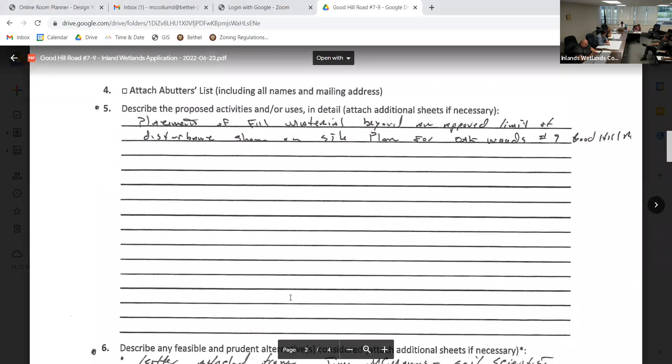If I can read, shown on site plan for Oak Woods, 9 Good Hill Road: the feasible and prudent alternatives considered. There is a letter attached from Jim McManus, a soil scientist, which as of this afternoon we just got. Very good, I have 4 copies. Okay, and then see attached.

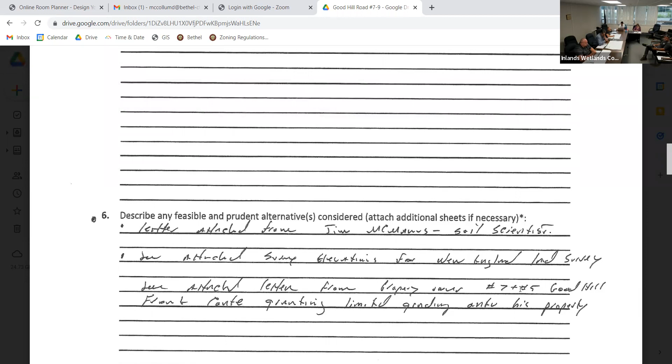Something elevations from our New England Land Surveying, which I'm assuming is the survey before you. Correct. See attached letter from property owner at 7 and 9 Good Hill Road, Frank Conti, granting limited grading onto his property. There's the signatures, and then there's the letter received from Frank Conti, essentially indicating activity having taken place on his property, which seems to be indicated by that line that goes to the north of the property line there.

No, where are you trying to point there, Kevin? This one. That's correct. Yeah, it's the dash line. I'm gonna point it out on the Zoom screen for you guys.

The context for this from a wetlands perspective is this was subject to a previous Inland Wetlands Commission approval for regulated activities, which included the buildings you see on that survey, the parking lot, the driveway used to service the property at 9 Good Hill Road, and the associated grading and other improvements. I can pull up the previous approved site plans for context as a comparison for what was approved before, so you guys can get an idea of the specific area we're looking at.

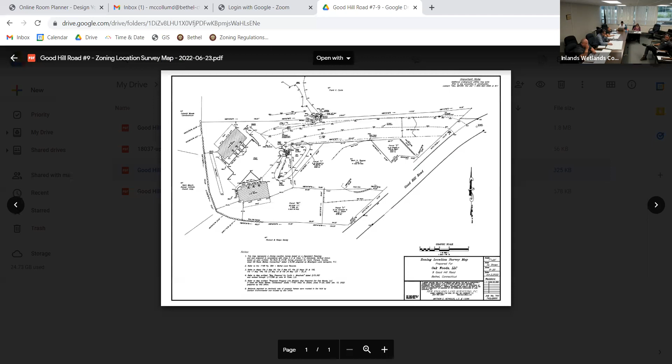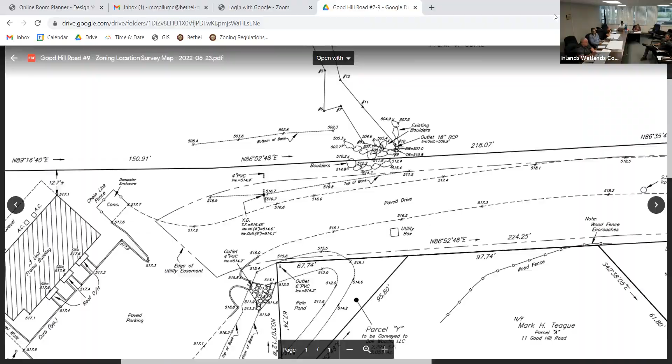Let me just pull up the survey here real quick so that everybody can understand what we're talking about. This notation here that says bottom of bank, this area my cursor is currently encircling, is part of what you're going to be looking at tonight for the application materials. And like I said, you're going to be comparing it to the site plan. Let me pull it up here on my screen.

And that was from, correct. Okay.

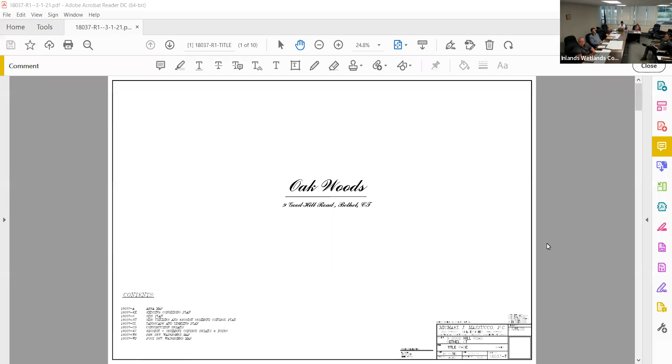I wonder if he knows he's on mute. Nico, do you know you're on mute? Okay, you can hear us. He's joined twice, I'm not sure. You can do that, I don't know if you're trying two different locations. Yeah, hi everybody, sorry, there you go. No worries, you hear me? Yes we can, thanks Nico. Your audio is messed up, so be careful. Excuse me.

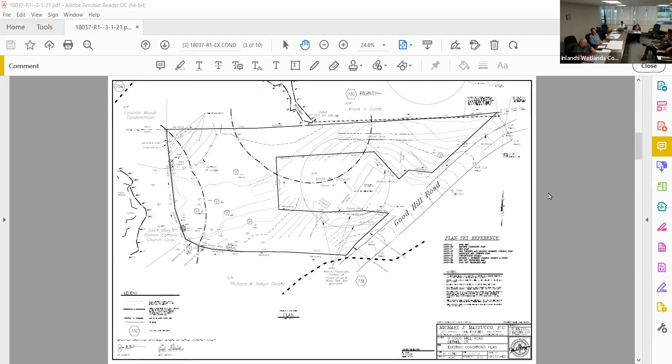Okay, so what you have up on the screen was one of the sheets from the approved site plans. The majority of what this site plan entails isn't party to what you guys are going to be looking at. In other words, the parking area, the buildings, the grading around the buildings where my cursor is going, that's not what is pertinent for this modification tonight.

What you guys are going to be focusing on is the area surrounded by my cursor here. What the approval was granted for was for grading to occur solely on 9 Good Hill Road. There is a clearing limit line, shown as the CLL, which is dashed, which was the approved limit of disturbance, showing it going in close proximity, but not encroaching past the property line for 9 and 7 Good Hill Road. There was grading that was...

The purpose of the grading there was so that the access driveway could be sloped down to meet the toe, or to match the existing grade with a toe slope there at that limit line, and then a retaining wall, which is where my cursor runs here on the screen. So that's what is being asked of you tonight, is to modify what was approved here on these plans to what is shown on that survey.

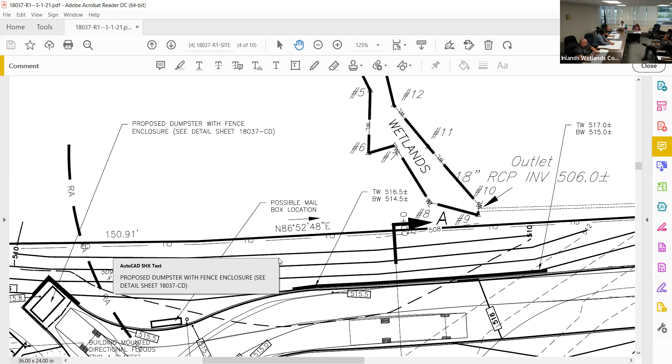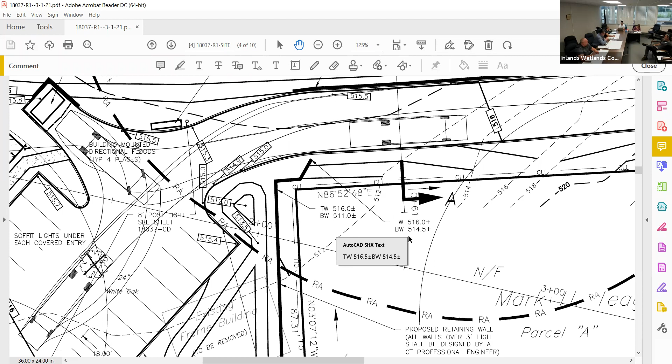What does conveyance mean? So the conveyances are - there's only one conveyance and one land swap. This has two conveyances. The conveyances are not germane to this modification. They're not part of what is being sought for tonight.

Okay, and can I ask about the rain garden looking different, shape-wise? The rain garden - the field modification for that, certainly if you guys want that to be included as part of what you guys review. The reason why that has been left out is because that regulated upland review area was already disturbed, and its alteration does not appear to have any direct or indirect impacts to any of the wetlands on the property. But I'll answer any of your questions afterwards. That's fine, I'll look up the definition.

Okay, so we're concerned with a retaining wall - the grading that has occurred is what is being sought for as a modification, and an alternative to that retaining wall being installed.

So just so I'm clear on process, we accept the application, then we'll listen to it and make a decision at the next meeting? Well, so it's apparent that there's a soils report from the wetland scientist that the applicant has in hand for you guys to receive tonight.

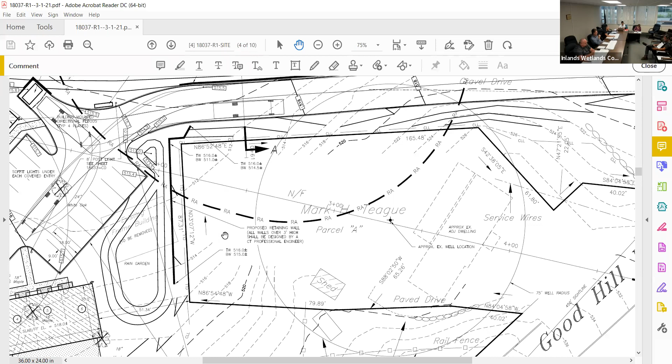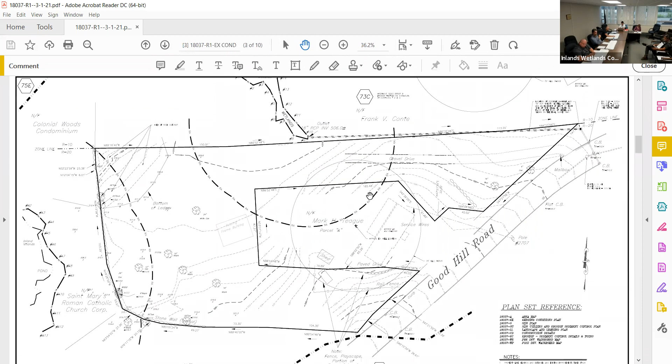Modified wetland application: an application must be submitted to the Bethel Inland Wetlands Commission requesting an ex post facto modification to their resolution of approval dated July 29, 2020, for the observed placement of fill materials beyond an approved limit of disturbance, as shown on the site plan set, Oakwoods, 9 Good Hill Road, Bethel, Connecticut, prepared by Michael Mazzucco, PE, dated April 5th, 2019, last revised April 12th, 2021. Please provide authorization from the abutting property owner of 5 Good Hill, Frank Conte, to submit this application for any and all encroachments onto the property as a result of the placement of fill materials.

So to start, I have a letter, and I'm going to give it to the chairman, that David put up there from Mr. Conti, which states he has absolutely no problem with the fill. Is this dated correctly? Just a copy for tonight, I have the original. Today's date is the 27th.

All right, so Mr. Conti, I can have it back for a second. I'm just going to read what Mr. Conti said: June 11th, 2022, to whom it may concern - I, Frank V. Conte, grant limited grading on the northern property line bordering property owned by Oakwoods LLC. Signed Frank Conte, 6/11. So he has absolutely no problem with the grading. We actually talked about it earlier in the process last fall.

Now, obviously, you guys have the map, you have a copy of it. You can see where we had New England Land Survey go back out there and survey the toe of the hill, where it meets the vegetated part of the property - basically the wood line, because it wasn't vegetated. We ended up regrading that slope so it went right to the edge of the vegetation. We're not covering any more vegetation, we just brought the slope down to a 2-to-1 slope. And then I had Jim McManus from New England...

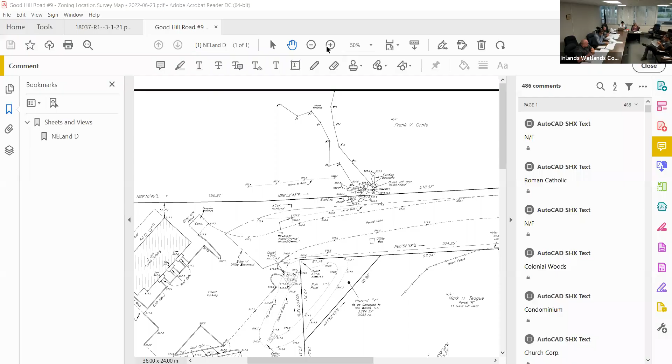So there was supposed to be a stone wall there. Yeah, well, we did a natural slope instead, we graded it. There was supposed to be a wall higher up on the driveway, which would give you the 2-to-1 slope drop. So I looked at the site plan in the field, and that would put a wall right on the edge. David, can you go back to the original site plan? Yes, I can. But right on the edge of the driveway, which to me would create...

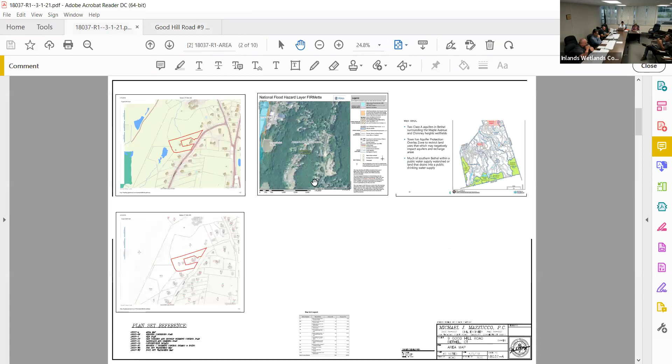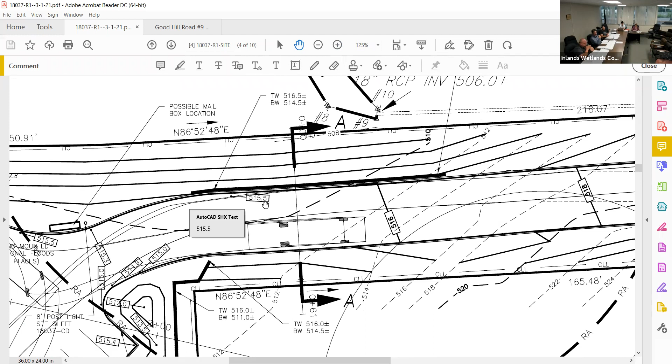While you're driving in, correctly following the dark line, is that your original retaining wall, that heavy line? Proposed? Yeah, you see the heavy line right there. Got it. So this heavy line would have been the retaining wall, which is only a 2-foot retaining wall, 24 inches. From here, here's the RCP pipe, up here to over here, we're somewhere right about here.

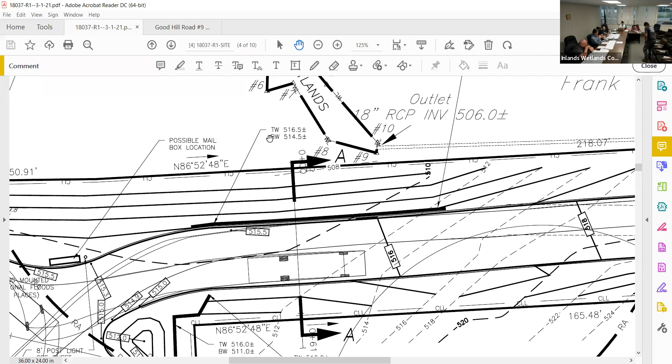Okay, and then it comes around and it does not go into the wetlands. It just encroaches closer to it, but does not, as Mr. McManus says, does not impede it, will not impede it in the future. Did the soil scientists look at it? No.

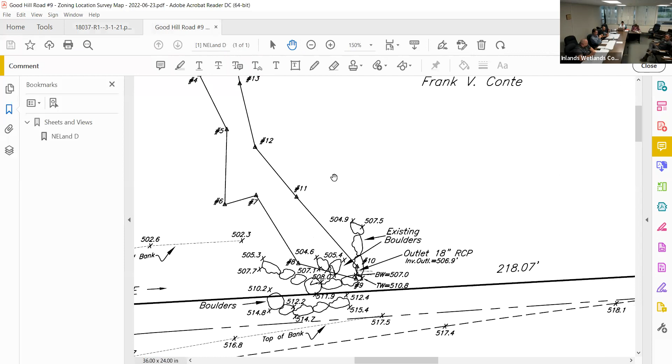I mean, the direct implication is just water volume. There's no more water going there. We're not putting water in, we're not taking water away. The only part of this application is that we're 6 to 8 feet closer to the wetland, in the upland review area. Not the wetlands, we're not in the wetlands, we're not 8 feet in the wetlands, we're in the upland review area, that's it. I'm just asking, do we need our soil scientist to look at it? That's at your discretion.

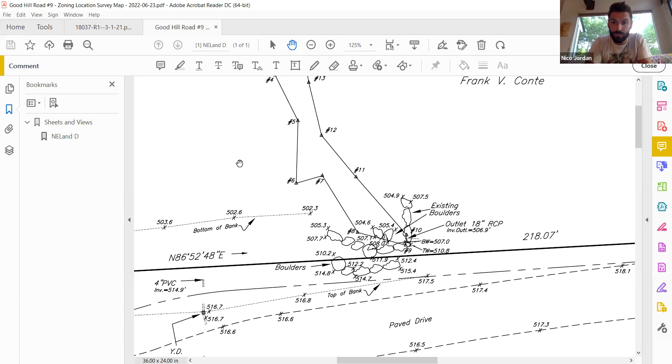The only problem I have with it is the work's been done before a permit was brought forth. We didn't even know that, I didn't know this until David said this might be an issue.

I have no problem looking at it and making a decision, but why don't we just have one of our soil scientists look at it, get his stamp, and ask for approval? I'm not even gonna go there because I don't think we had that.

That's not what was agreed upon. That's why we're here. I'm looking at it no matter the reason why. Normal process for us is to accept, and I've tried to approve same day and not been allowed to, so my thought is...

Get the information tonight. I don't see this being a long drawn out thing. Have our soil scientist take a look at it. I'm not a soil scientist, but I'm not expecting a red flag. Then we'll make a decision next meeting.

The soil scientist you guys have worked with in the past from the Northwest Conservation District, her name is Cynthia Rabinowitz. Are you requesting her to do a third-party review of the activities that have taken place? Yeah, it seems reasonable.

I don't feel that it's an on-site type thing. I'm not an engineer, that's why I'd like them to look at it, that's all. It's not gonna hold anything up.

I agree, I like Cynthia Rabinowitz, I think she does a wonderful job. But I would also ask that if they're gonna go out there and look at this, to report what kind of water is coming out of there from a town RCP pipe that was put in there, that shouldn't have been put in.

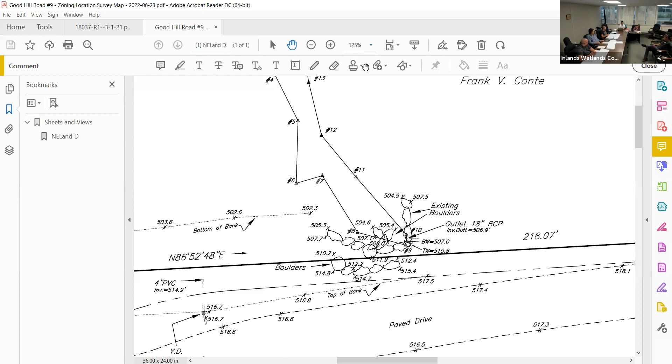No concerns, we're good. So do we want her to conduct an on-site investigation, or do we want her to just refer to the documentation that's been given? If she's comfortable from what's in front of us, that's all. If she's comfortable with the documentation, it's fine by me, the wetlands soil scientist, but if she feels concerned, get it taken care of.

Okay, that's fine. I'm a taxpayer too. I don't want to spend any more money than needed. Again, there's no reason to make it longer. I just got my taxes. Yeah, won't go there.

Okay, so when would you guys like to have her findings brought to you by? Well, I would like to get this... October? No, I'm kidding, next meeting. Sorry, I had to say that. You can do it so, next October, as far as I'm concerned. By that time, I'm done.

I'm moving forward, so your next meeting as per your schedule that you made at the end of last year is July 25th. Yeah, that'd be nice. Yeah, she could have it. I'm okay with that.

I don't know if it's possible to have it a week before or a couple days before. Sure, just prior to the meeting, so that way we can review and approve. Give us a chance to look it over. I don't see a major thing. I don't think it's a long read either. I think it'll be a pretty quick turnover.

So would a week's time to have you read it be enough, or would you want it sooner? I mean, unless there's something explosive in there that we're not predicting, which I doubt. The only thing I would say is if there's something that surprises us, to give Mr. Draper's team time to address it, but I don't foresee that happening.

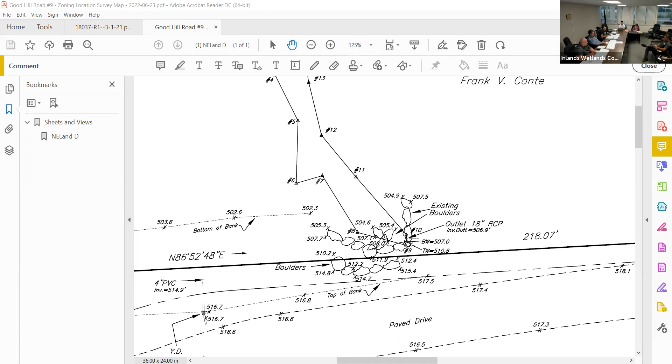Let's reach out to cyberspace. Nico, Pat, Sal, do you guys have any questions? Hey, that's all right, thanks. I do not, as long as you guys covered everything that was in the documents. I saw that DeMayo called out a bunch of changes and stuff. Did you guys already go over that?

Right, so there are engineering items, some of which are germane to what is part of the regrading, some of which are not. We can go through that more in detail if you want.

Once Mr. Draper's engineer, Mike Mazzucco, satisfies or addresses all of the comments that James has. Which he has already. I have the letter and I can read it if you want.

I'll just go with what's germane to any kind of wetlands type thing, or rain garden or something, because Lawrence, give me the copy of it. What is the date on that? June 23rd. We have a copy of it, we can make you a copy of this whole thing. This was from David McCollum to James DeMeo.

I'm just gonna read it real quick, just germane to wetlands. As you know, I was present at the site visit, conducted on 6/9/2022. The following comments were discussed with the property owner and their engineer, Mike Mazzucco. Additional documentation needs to be submitted.

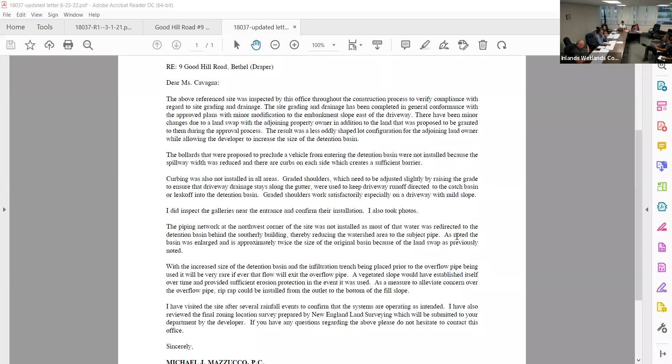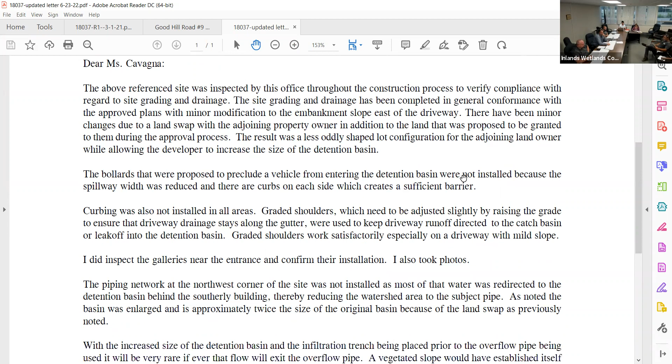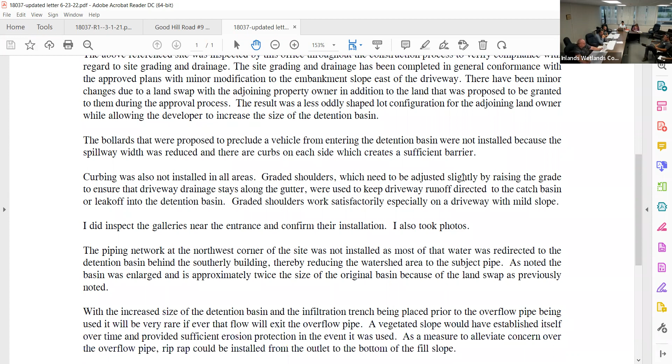There have been minor changes due to a land swap, which Pat asked about, and I can go on about it, with the adjoining property owner, in addition to the land that was proposed to be granted to them during the approval process. The result was a less oddly shaped lot configuration for the adjoining landowner, while allowing the developer to increase the size of the detention basin.

The bollards that were proposed to preclude a vehicle from entering the detention basin were not installed because the spillway width was reduced, and there are curbs on each side which create a sufficient barrier. Curbing was also not installed in all areas. Graded shoulders, which need to be adjusted slightly by raising the grade to ensure driveway drainage stays along the gutter, were used to keep driveway runoff directed to the catch basin or leak off into the detention basin. Graded shoulders work satisfactorily, especially on a driveway with a mild slope.

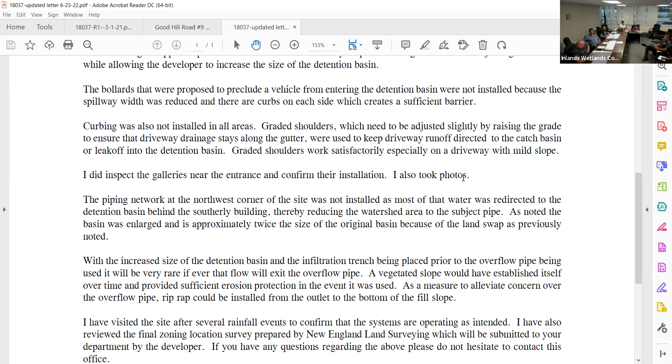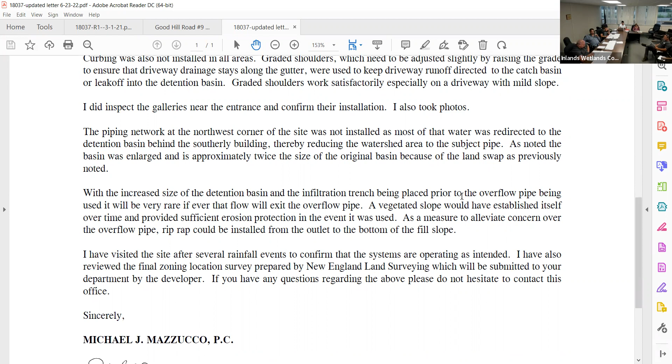I did inspect the galleries near the entrance and confirmed their installations. I also took photos. The piping network at the northwest corner of the site was not installed, as most of the water was redirected to the detention basin behind the southerly building, thereby reducing the watershed area to the subject pipe. As noted, the basin was enlarged and is approximately twice the size.

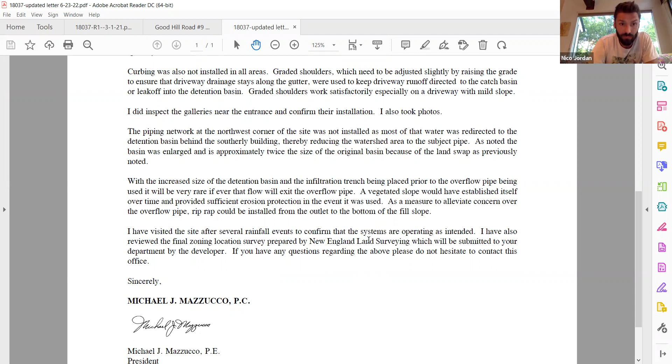This is the rain garden. It's approximately twice the size of the original basin because of the land swap as previously noted. With the increased size of the detention basin and the infiltration trench being placed prior to the overflow pipe being used, it will be very rare, if ever, that flow will exit the overflow pipe. A vegetated slope would have established itself over time, which is seeded and hayed right now, and would provide sufficient erosion protection in the event it was used.

As a measure to alleviate concern over the overflow pipe, riprap could be installed from the outlet to the bottom of the fill slope. I have visited the site after several rainfall events to confirm the systems are operating as intended. I have also reviewed the final zoning location survey prepared by New England Land Surveying, which will be submitted to your department by the developer, which it has. If you have any questions, please do not hesitate to contact this office.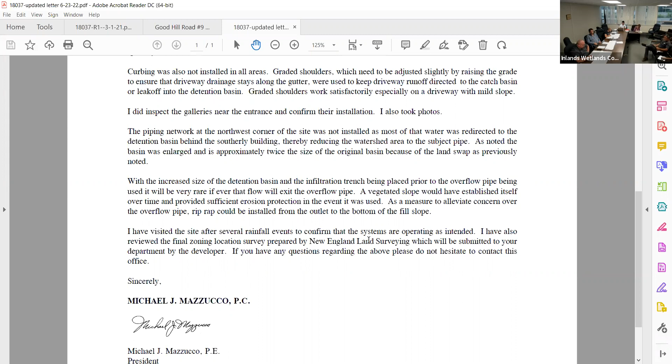So what I would say is you should consider receiving a letter from our Public Works engineer, James DeMeo, to confirm that everything in that letter sufficiently addresses his concerns. James should be giving it to David, if he hasn't already. I talked to James on Friday myself, and he was just waiting for Mike to change two things, then it should be an automatic process. So once I get that letter from James, if he hasn't already started working on it, you guys will have that ready for your July 25th meeting.

Can I just ask one thing and make sure I'm allowed to? Pictures of the slope that we're talking about, isn't that from a what month? These are just vegetated. Oh yeah, because I'm gonna see if a storm comes through. I expected, I had a little bit of grass on there, everything looked beautiful, but just in case I want to make sure there's no issue. Well, the driveway, everything is pitched.

David, can you bring up the site plan? You can tell that from here, just from this photo you can see the pitch of the driveway going down. I just want to make sure we have a heavy storm and we don't have that erosion. What if we have a heavy storm while the seed is progressing and it just washes away to begin with?

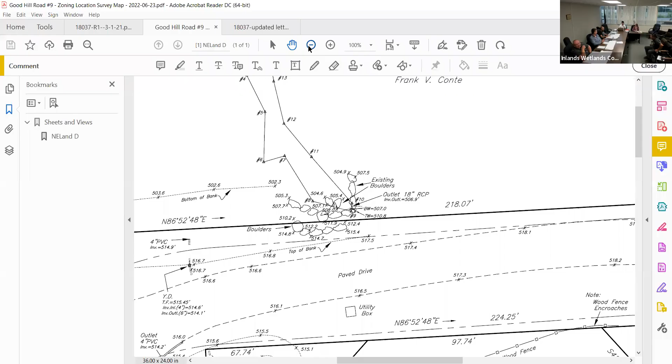I had that happen to my house in Torrington. We just requested to fix it. Yeah, just blow it up please. I totally understand. Shrink it down, I said it backwards, just so it shows the whole site.

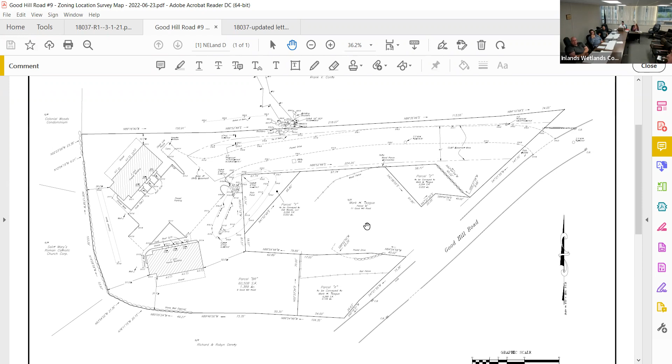So this area right here was the property of 9 Good Hill Road. I conveyed this to Mark Teague, not in exchange for anything. This was part of the planning and zoning approval, not that I asked for it, this was a request. I gave it to Teague. It wasn't planning and zoning making me give it to Teague, I just want that crystal clear. So I'm doing this because a lot of his stuff is on here: his fence, his driveway, his play set, his shed. I also paid for this wooden fence along the top of this hill right behind his house because his yard goes out and then it drops down. All back in here is sumac trees, and it's very steep. And that's my property, but it's level. So what we did, and there's a stone wall here, was cut all his grass, his house.

Matter of fact, this fence encroaches on my property, just so you know. Okay, and I don't have a problem with that.

He was cutting all the way down to here. Mark's house is right here, 20 foot off of this line on an angle, and it came across like this. So to make it more equitable, we're not taking his yard, because I don't want it. I said, Mark, he was doing nothing down here because this all slopes down to a flat area. I said, Mark, do you want to do an equal land swap with this piece of property?

And I'll take it down here, that way I can enlarge the stormwater rain garden, detention, whatever you want to call it, so it looks nicer. And he was like, absolutely, because now I have a yard. So it was mutual, and he's happy with it. As a matter of fact, that answers your question.

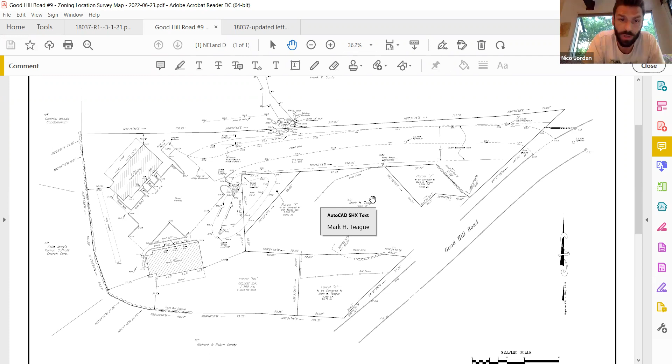So the rain garden is probably twice the size of what it was. We're capturing even more water, and it's a vegetated state with something called salix, which again is a willow. I thought I might have had his in here. I just want to.

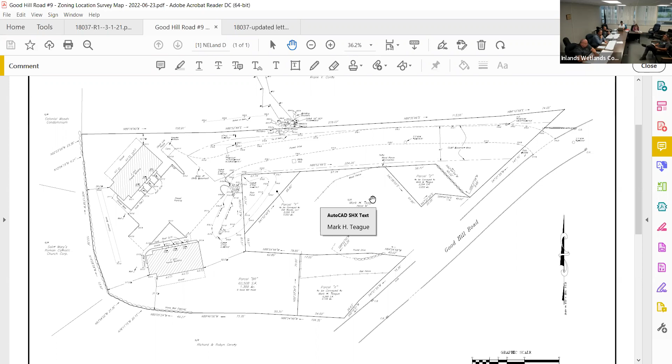And I sent this to David on June 10th. This was just after Mr. DeMeo, James and David and myself and Mike Mazzucco were out there, and it's addressed to whom it may concern. Unfortunately, Mr. Teague has a pretty tough mortgage company to deal with, trying to do the land swap, so it's taken time.

This is something that Mark Teague signed as well as I did, and this was just something so that we agreed on it. I just want to read this to you so you all understand what's going on and that I'm a good neighbor. Mr. Teague's mortgage complications for the land swap and conveying parcels is ongoing. See a letter from Morris Law Group, which I did send to David, concerning this ongoing matter, which will be addressed when his mortgage company issues the release, mutually agreed by both parties.

I just mentioned about the fence. I have no issues with the encroachment on it.

There was a question about spruce trees on the backside of the rain pond, but now the rain pond's bigger, it would be right into the hillside, didn't make any sense. So we put the trees on the other side. We didn't want spruce. And again, we agreed on it together. What kind of trees do you guys want, is what I said to him. The whole idea was that we put a lot more trees on this property so people wouldn't see this as much.

Frank Conte wanted some pine trees, he got pine trees. Mr. Mark Teague wanted flowering trees, he got flowering trees.

Bradford pears were placed instead of evergreens along the driveway for better screening, and I already wrote that, all mutually agreed to. There's actually 2 additional parking spaces on the property, which wasn't required. There's almost 50% more deciduous trees for screening that was shown on plan. And then the back part, it's actually changed because I did locate some pines.

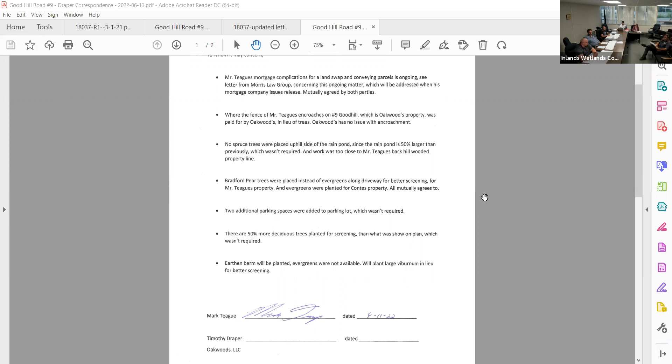The earthen berm will be planted. The earthen berm has been planted with evergreens, which was on there. It was white pines, I believe. And that's all set, so that's done, just so you know.

So if you remember, this was a wetlands thing, why those pines went in there. Because when the tree frogs and the amphibians and all those things want to do their thing in the springtime, they didn't like the light.

One other thing was brought up about the lights on the back of the buildings. It's actually a building code where they have to be on a building, that's what they are. That was the old plan, wasn't it? I don't remember, but it was brought up, and I'm just bringing it back up to you since it was brought up to me. That's for safety, it's a building code that has to have light on the back of a door, on an entry door. That makes sense, though. Oh, absolutely, that makes sense. Can't be argued.

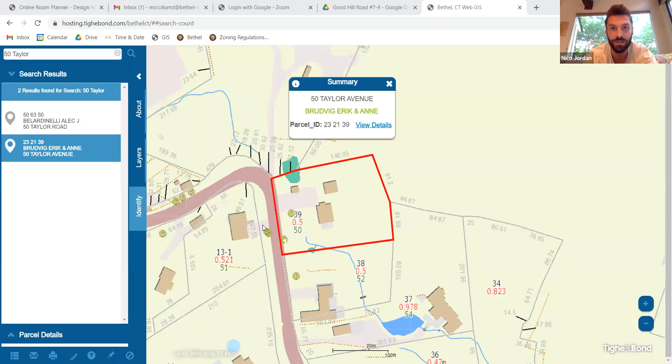How's Bethel, you guys? I'm up in Vermont right now. I was gonna say, you don't look like you're in Bethel there, Dave. We're in Vermont, I got my luau shower. I'm up in Stowe at the moment. I was in Hubbardton all last week. It's beautiful up there. I spent a lot of time in Hubbardton, in the West area. I go up there in the summer, I don't go in the winter. No way, I love snowboarding up there. Yeah dude, there's so many cool waterfalls and everything around here. It's really nice, it's been good. So I'll be back down tomorrow.

To get us back to reality, sounds like a blast Nico, but there is a planning and zoning - a zoning permit application that has been submitted to the land use department for 50 Taylor Avenue. It is the property whose bounds are highlighted in red on the screen. It is before staff for 2 additions to an existing single-family dwelling, whose structure is where my cursor is on the screen. I don't know if you guys can see that. Okay.

As part of the work to construct these 2 additions, part or the entirety of an existing septic system has to be replaced. As part of that, an existing pipe that carries water from a water course, which is this blue line here - the inlet for the pipe is here, and the outlet for the pipe is here. It goes into a wetlands area, and the water course here and the wetland system here were both flagged by a soil scientist. This section of pipe that connects the two has to be replaced.

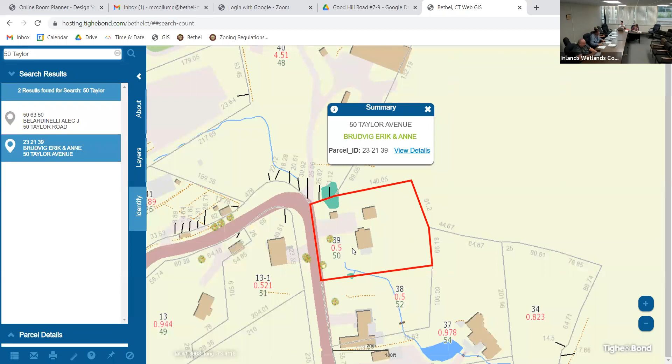I just want to make sure your guys is okay again, just because this is substantial for an agent approval application, and I just want to make sure I'm not going outside of my bounds as your agent to review. Not at all, Dave. You're good. Okay, that's all I've got.

Commission comments? Anyone have any? Craig? Kevin? I'm okay, I'm good. I have a question.

I heard, I don't know if it's correct, there is a report that is published every year by Bethel, or required by the state, on how Bethel maintains their waterways. I think that is part of what you're referring to as the MS4.

Okay, so it's a new program that has been spearheaded by the state over the past couple of years, which we've been in compliance with ever since it started. It's essentially us monitoring our systems that relate to water that comes from roadways, or that discharge through systems that are owned by the town, and how it's maintained.

Would it be possible to start getting a copy of that, seeing how we have wetlands, we have water courses? I would like to actually start seeing that, 'cause we get a lot of comments like we did tonight, snide remarks about what the town's doing or not doing, and not that we want to address it that way, but I would like to kind of see it.